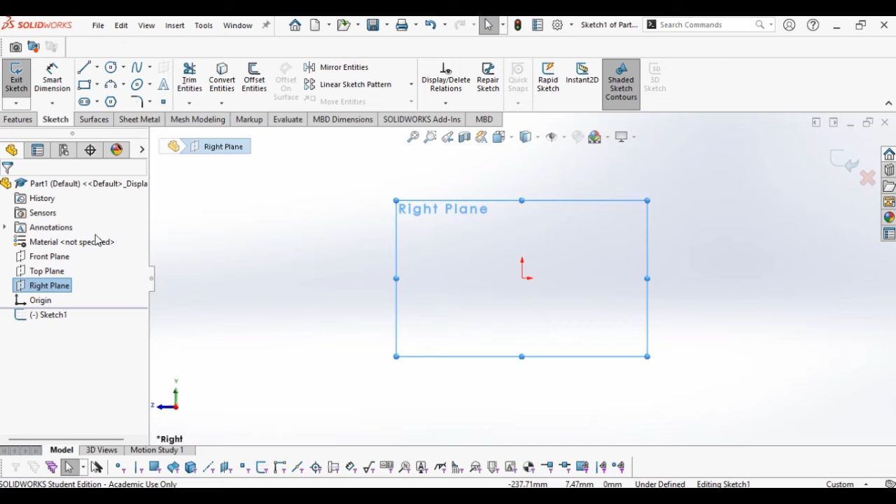Okay, so this is making a bicycle frame using SolidWorks. First we'll make a sketch on the right plane, and in this sketch we simply need to create the geometry of the bicycle frame. So what I will do is follow this geometry and sketch it accordingly.

So what you do is you just try first to sketch the general shape of the bicycle, and for me it kind of looks like this. Then from there you could populate it with the proper dimensions.

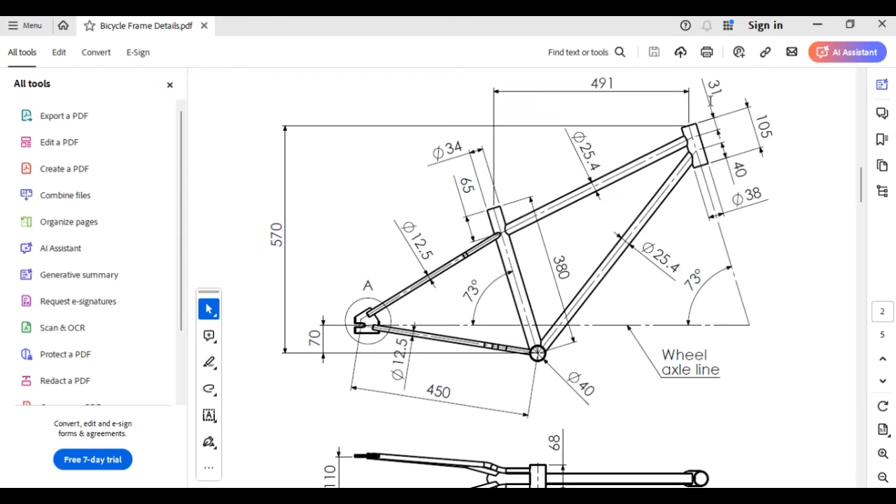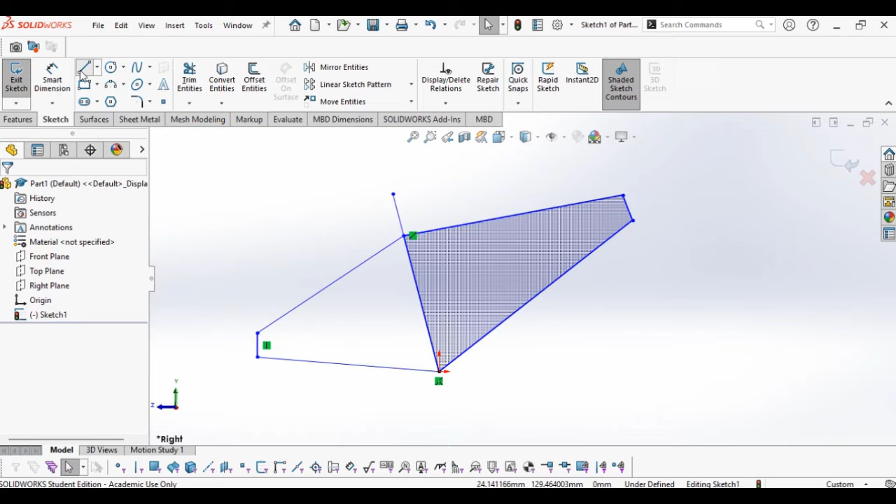So let's start here. So there's a 65 and 491, 31. All right, so there's an extension here, something like that. I'll make them there. So 105. There's gonna be some sort of a line here, and then I'll make this coincident, and this one coincident there. So we have that.

I'll make a reference horizontal line so we could get the proper angles later on. So first, this needs to be at a certain angle. I think it's something like 75. Let's check - 73, and the other one is also 73. So let's change this to 73, and this one is also 73.

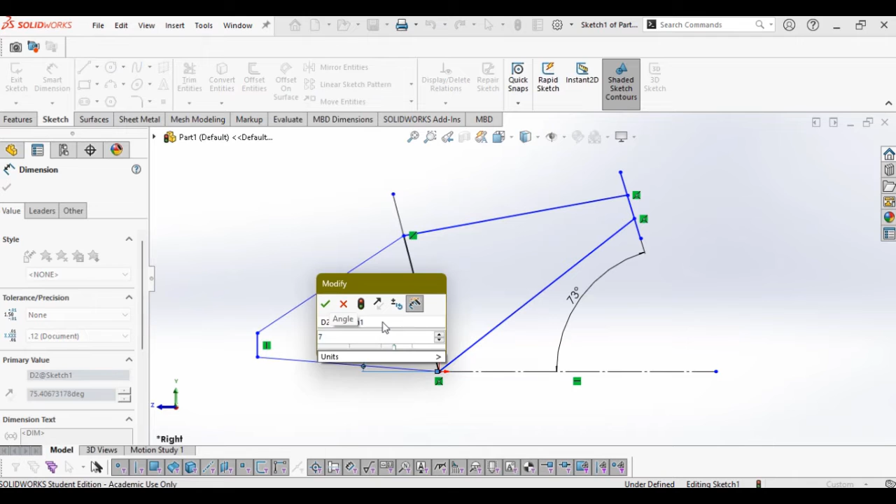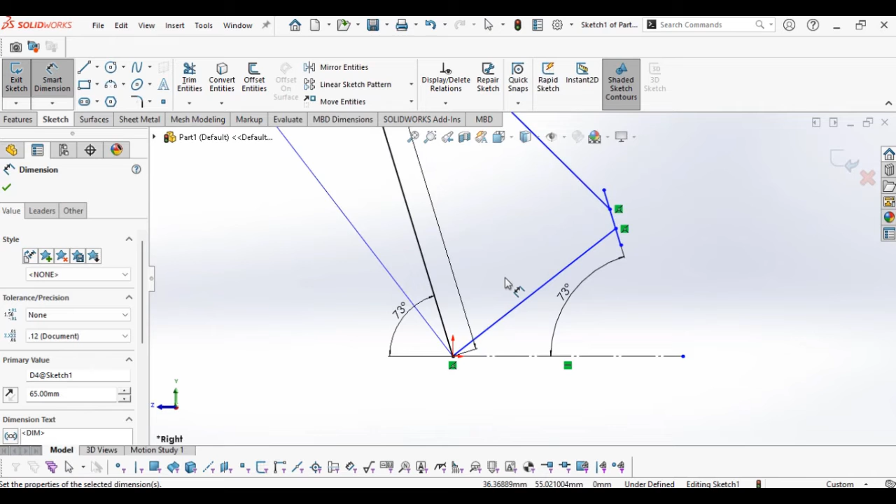Okay, what's next? This is supposed to be 491, 65, 380. So this is supposed to be 380, and this is supposed to be 65. So now it's kind of making a mess - I guess you just have to adjust it accordingly. Once we put in the proper smart dimensions, all of this would fix itself, hopefully.

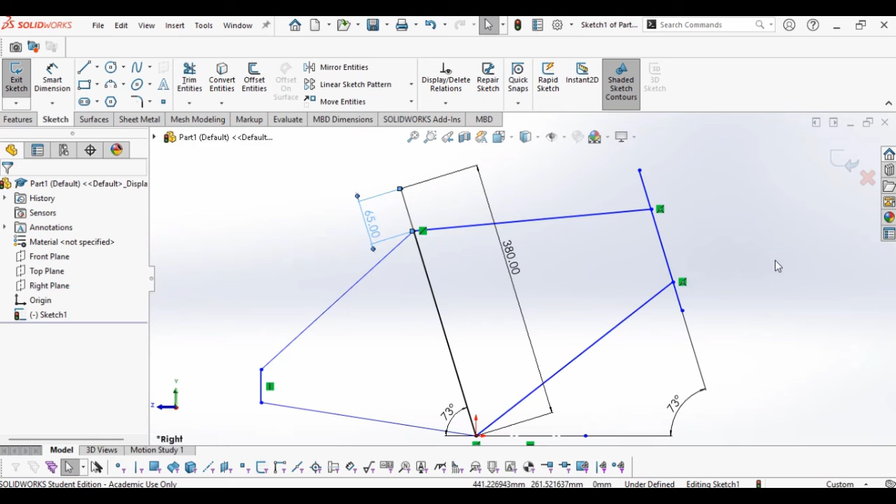Alright, so that's good. This one is supposed to be 491. This is supposed to be 105. Okay, so far so good.

So 31, 40, 31, and then 40. Alright, so this should be 31, and this is supposed to be 40. Okay, so what else do we need?

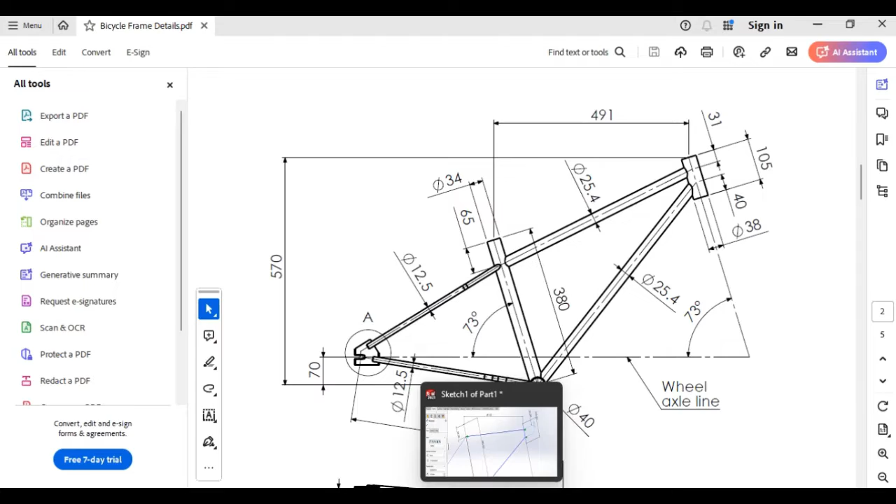What about the height? So from the bottom bracket, 570, and then 450. So the height of this is supposed to be from here, 570. Chainstay length is supposed to be 450.

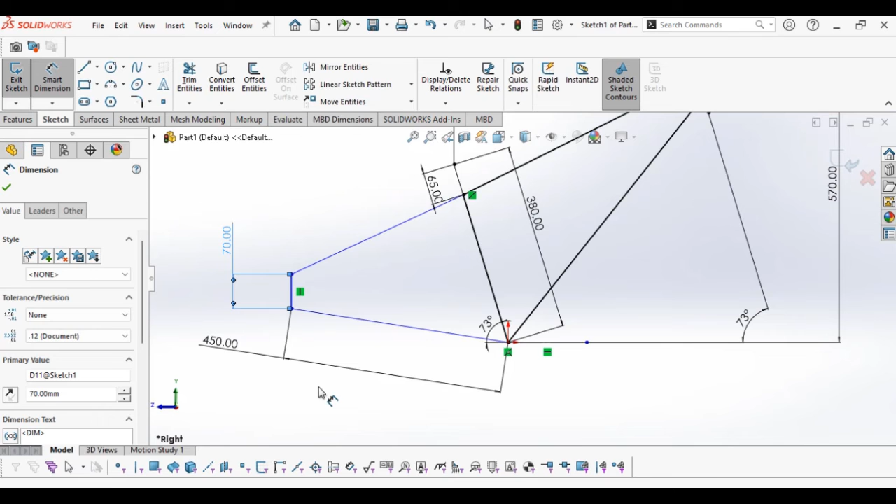This is supposed to be 70. And there's an offset between the bottom bracket and I guess this point here, and that's 70. Yeah, 70. So this is supposed to be 70, and by this time we should see it somehow black.

So everything is black. I think this is too steep. Maybe this is supposed to be 30. It kind of looks better now.

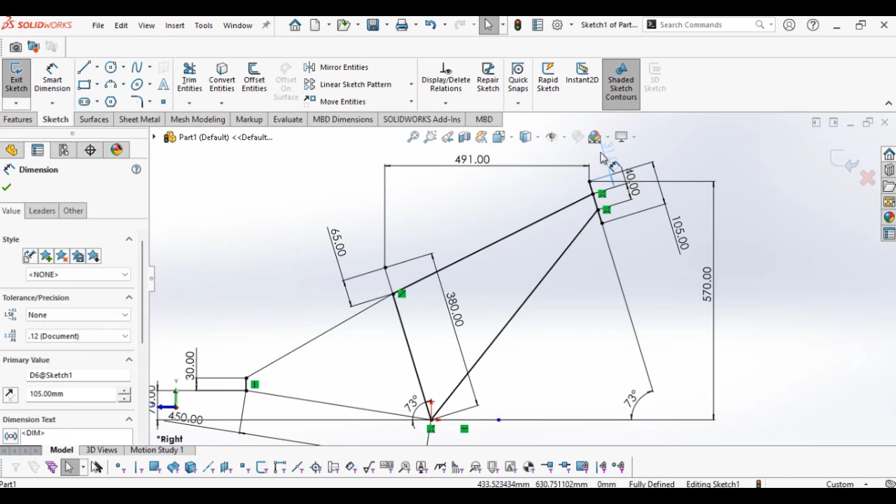So this is what you're supposed to do first to make a sketch like this. Now before exiting the sketch, we have to put several points here, in there, and perhaps maybe, yeah, I think just here, one point here. We will use this later to create our planes. Okay, so 1 and 2.

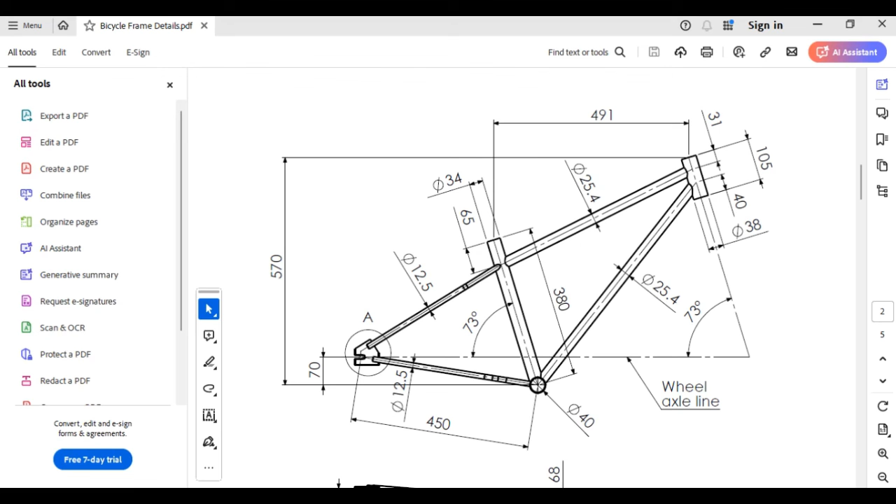What else? Yeah, 2 points there. Maybe another point here. You could also do that, just in case we need it later. There. Then you exit the sketch.

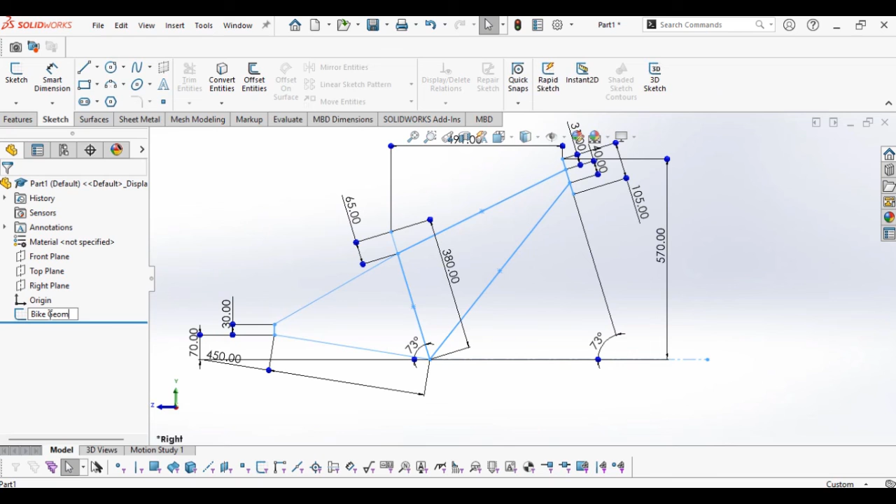So right now we have the geometry of our bicycle. So I suggest changing the sketch name to maybe 'bike geometry'. This will help you organize your model later on. So I guess this is the best time to save it. So I'll save it, and when we get back, we will proceed in creating the 3D elements.